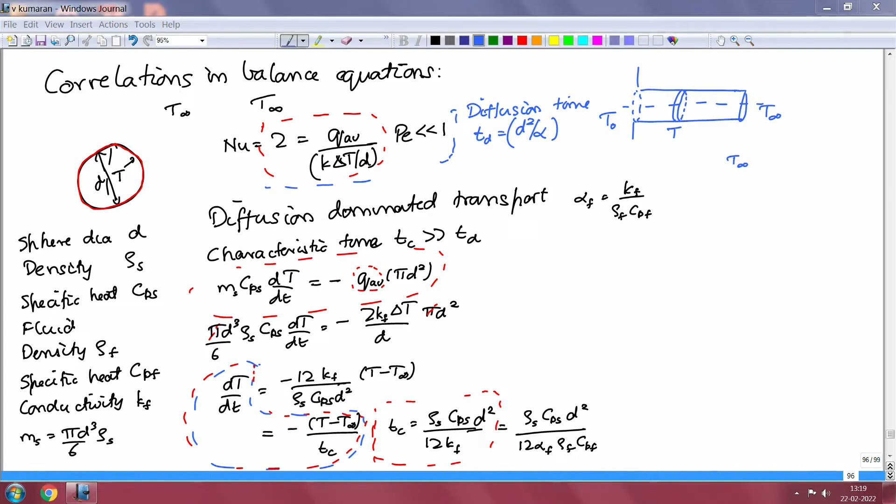The assumption that was made in deriving the correlation shown here, the Nusselt number is equal to 2 in the limit of low Peclet number, is that the object is at steady state. You have an object at a constant temperature in a fluid at a different constant temperature, and the flux is calculated. That is the assumption made when the correlation is derived.

In this particular case, the temperature of the object is changing with time. The correlation can still be used if the time required for the change in temperature of the object is much longer than the time required for the system to reach steady state once an object at a fixed temperature difference is introduced.

If you have a configuration where the entire system, the object plus the fluid, is at the same temperature at time t equals 0, and at time 0 you increase the temperature of the object to some finite value, it will take some time for the temperature of the fluid around the object to reach its steady state value. That steady state value is a higher temperature closer to the object and a lower temperature further away. We will solve for that later.

So the time it takes for the temperature field, the spatial variation of temperature in the fluid, to reach its steady state value matters. If the time required for the surface temperature of the object to evolve is much longer than the time required for the temperature field around the object to reach its steady state value, then you can still use a correlation that is derived at steady state.

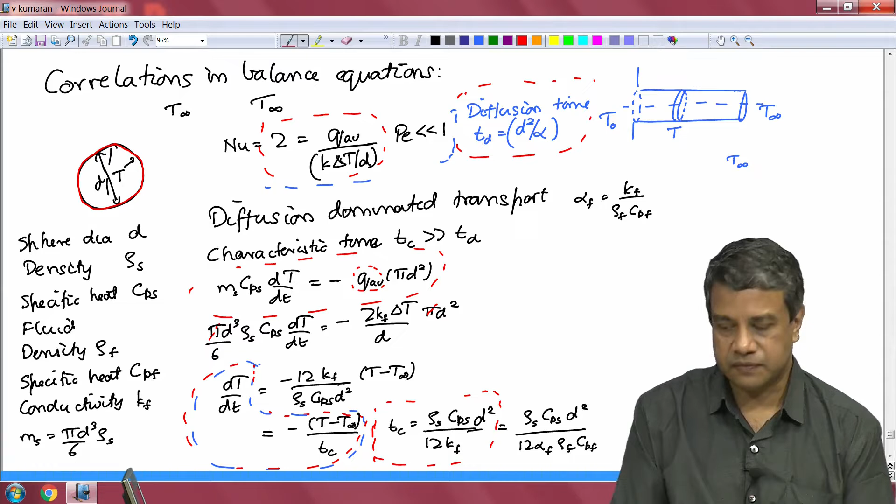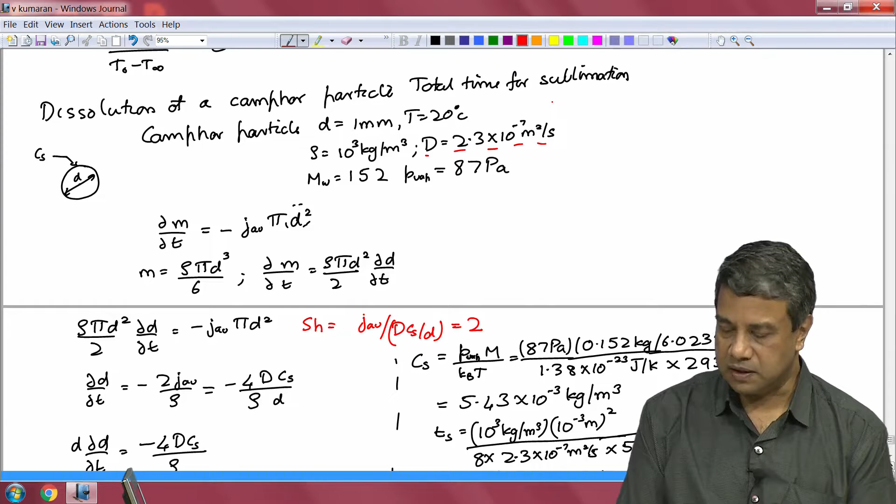We had looked at examples in diffusion dominated transport where the characteristic time for the evolution of the temperature of the object is much greater than the diffusion time. Or alternatively, in cases of dissolution of a particle, where the characteristic time for dissolution is much larger than the time required for the concentration field around the object to reach a steady state value. So, those we examined.

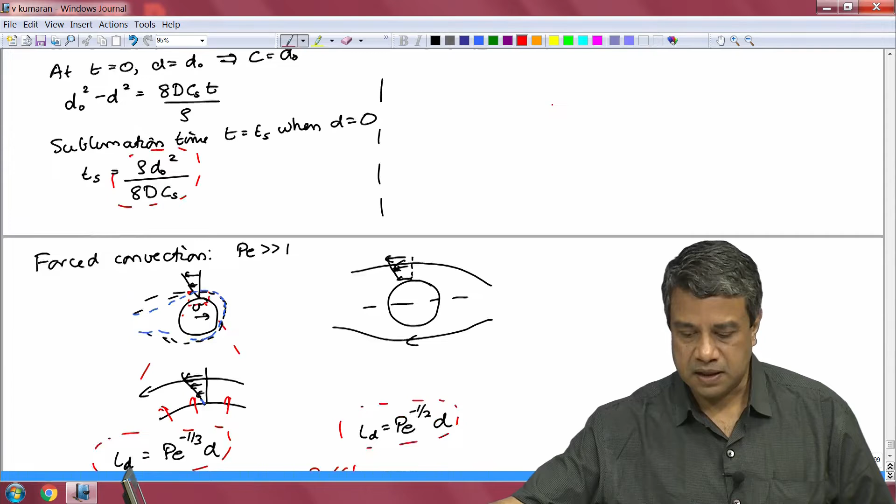The next is to look at forced convection. Forced convection at high Peclet number, the limit of high Peclet number, where convective effects are large compared to diffusive effects. You have a rapid flow past the object.

Even though convective effects are large, diffusion cannot in general be neglected, because convection only transports mass and energy along the fluid streamlines. At the surface of the object itself, whether it is a solid object or a gas bubble, there is a no penetration condition at the surface.

The velocity perpendicular to the surface is zero, and therefore transport perpendicular to the surface has to necessarily take place due to diffusion. So, for example, if you had an object of higher temperature in a fluid of lower temperature, the energy from the object will be transported due to diffusion perpendicular to the surface, and it will be swept downstream due to the fluid flow past the object. In the limit of large Peclet number, the energy conducted from the object will be swept rapidly downstream, and therefore the temperature difference due to this energy transport from the surface will be restricted to a thin region near the object.

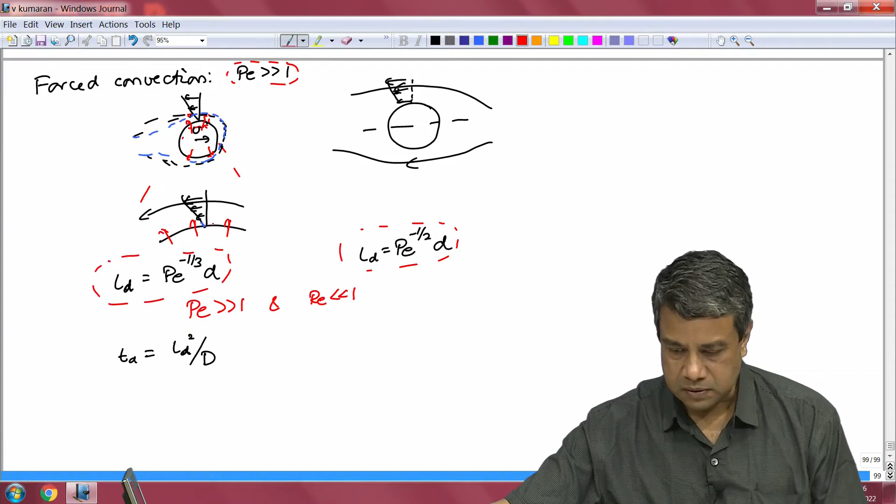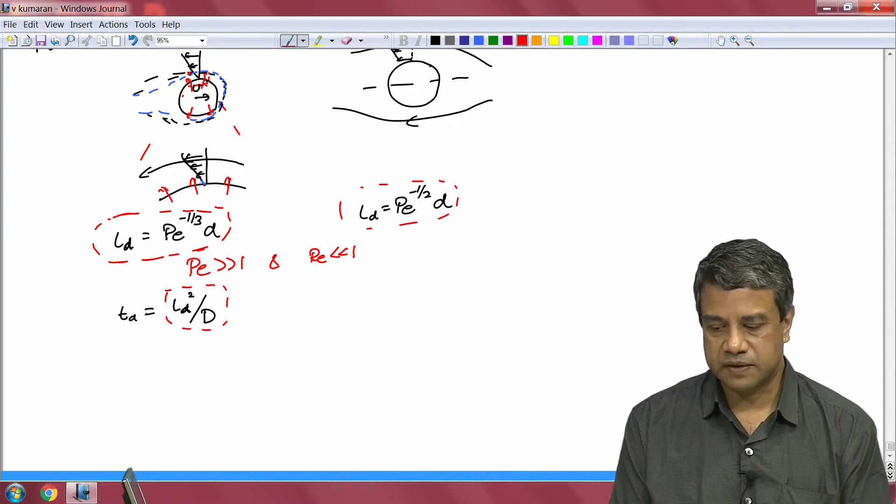So, in these cases the length scale for diffusion is actually much smaller than the dimension of the object. If LD is the length scale for diffusion, then the time scale for diffusion you just get out of dimensional analysis as LD squared by the diffusivity. That is the characteristic time for diffusion for the temperature field to develop in this thin boundary layer, or the concentration field to develop in this thin boundary layer when the surface concentration or temperature is changed. So long as the diffusion time is much smaller than the evolution time for the temperature field in the object, you can use a steady state approximation correlation for forced convection that is derived based upon the steady state approximation.

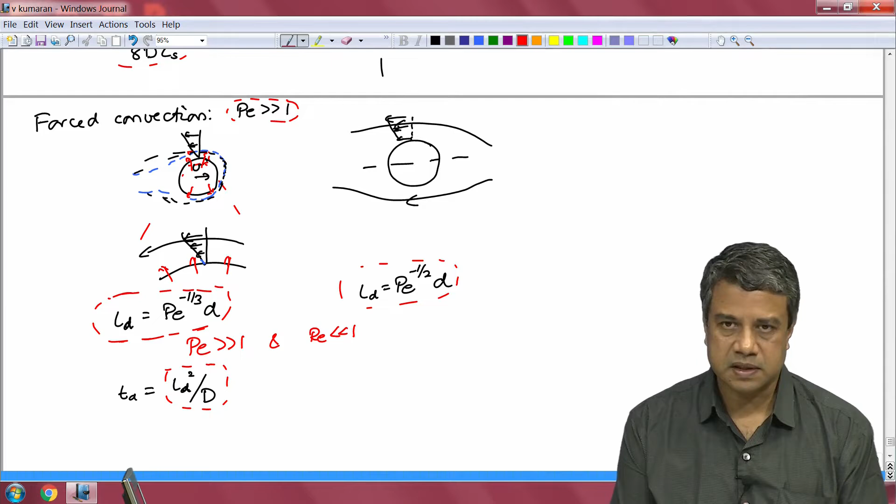So, let us briefly summarize the characteristic length and time scales for different configurations. Last time I had told you that there is a distinction between objects which have a no slip condition at the surface, where the surface is solid, and objects which have a slip condition at the surface, where you have a non-zero tangential velocity at the surface. So, let us examine that.

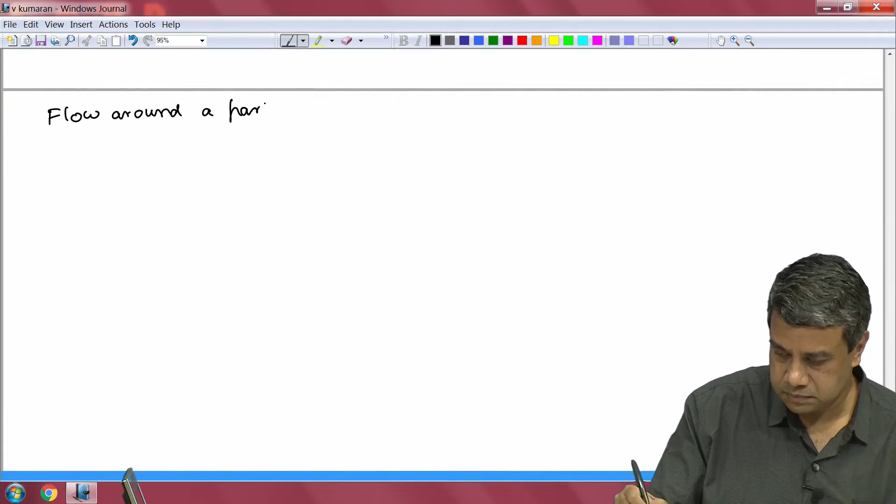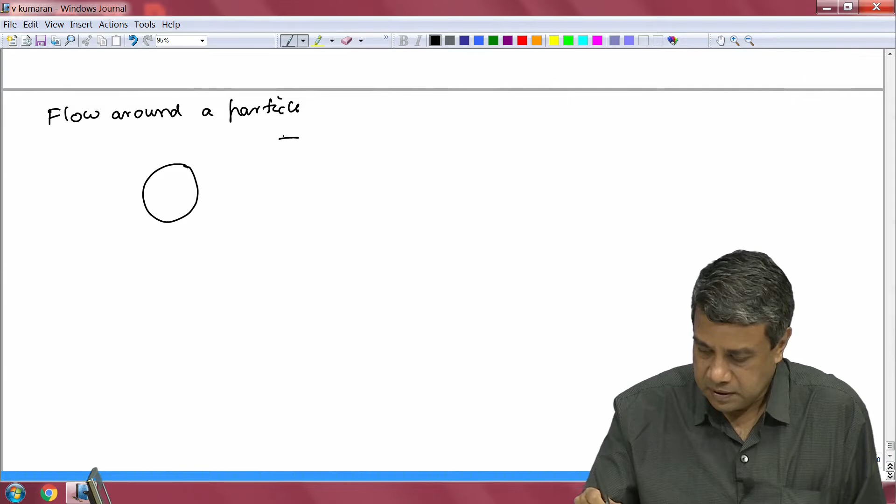First, we will examine the flow around a particle. If you had a solid particle, for example, you would have a no slip condition. So, if Vfs is the free stream velocity, and you have flow around a particle for large Peclet number, where convection is dominant, and small Reynolds number where the flow is laminar.

Recall I had told you that you can simultaneously have the limit of large Peclet number and small Reynolds number, because momentum diffusion is much faster than mass diffusion in liquids. In gases they are comparable, and therefore this regime does not exist. But in liquids, mass diffusion is a very slow process because it involves the physical transport of molecules, whereas momentum diffusion does not involve physical transport, it could be due to intermolecular forces, and therefore you can simultaneously have high Peclet number and low Reynolds number.

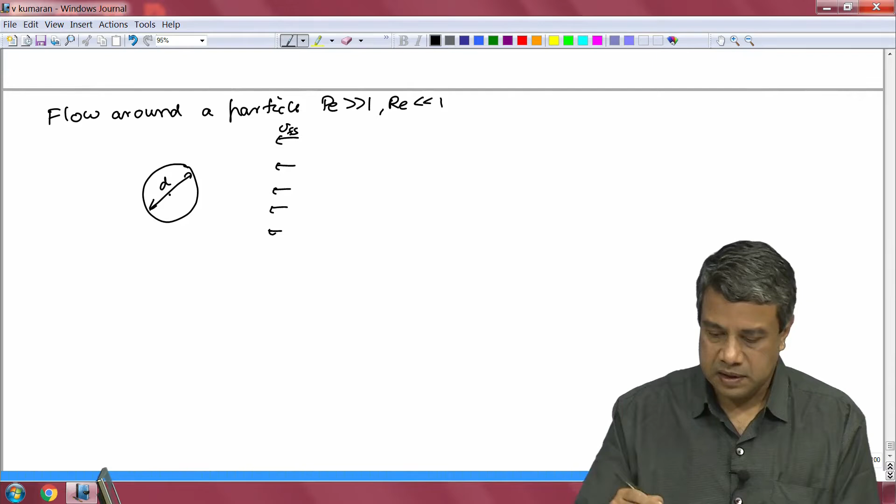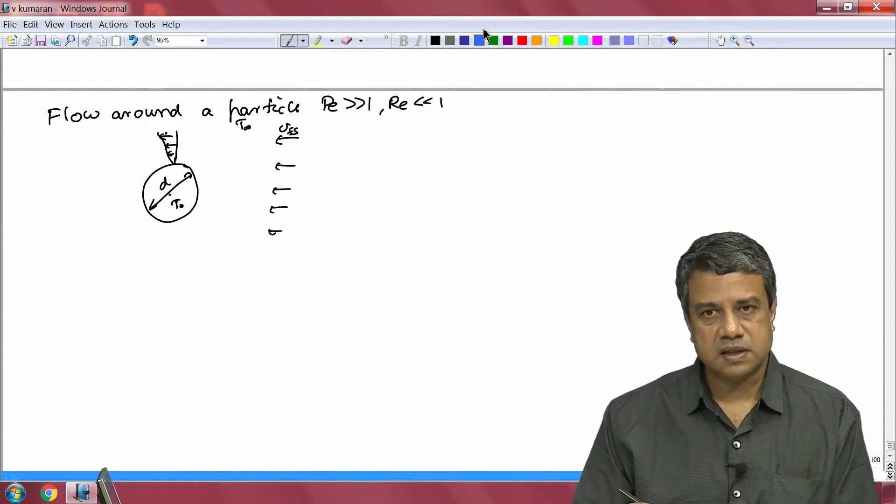If I have an object of characteristic dimension d, in the limit of high Peclet number, with a no-slip boundary condition at the surface, the velocity has to decrease to 0 at the surface. If you had an object with temperature T naught at the surface and T infinity far away, the temperature disturbance due to this higher temperature of the object will be restricted to a thin region called a boundary layer close to the surface.

The thickness of this boundary layer scales as Peclet number to the power minus 1/3. In the limit as the Peclet number becomes large compared to 1, the thickness of this boundary layer scales as Peclet number to the power minus 1/3.

Because the thickness of this layer scales as Peclet power minus 1/3, the correlation for the Nusselt number is the thermal conductivity times the temperature difference divided by a characteristic length. In this case, that characteristic length is the diffusion length, which is Peclet power minus 1/3, and therefore the Nusselt number is proportional to Peclet number power plus 1/3.

Basically the Nusselt number scales as the inverse of this characteristic length. This characteristic length is Peclet power minus 1/3 times the diameter. The ratio of the characteristic length for diffusion, LD, to the diameter of the object is Peclet power minus 1/3. Because the flux is the temperature difference divided by this characteristic length, the Nusselt number scales as Peclet power plus 1/3.

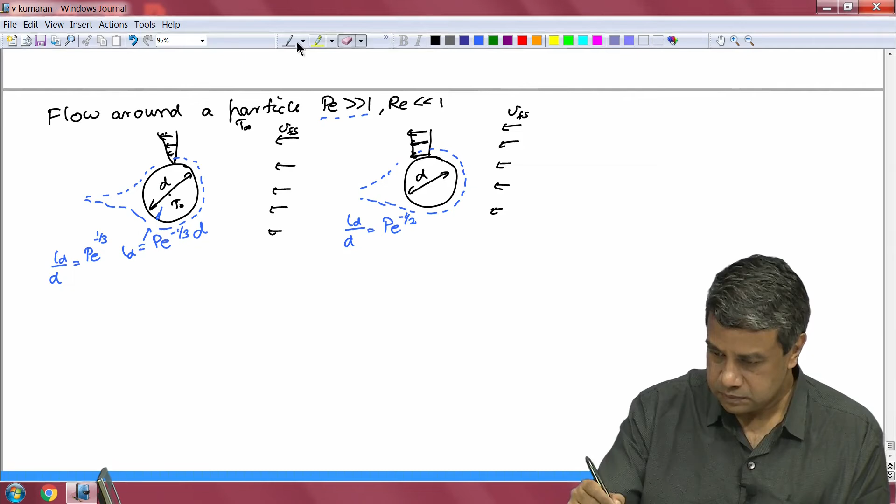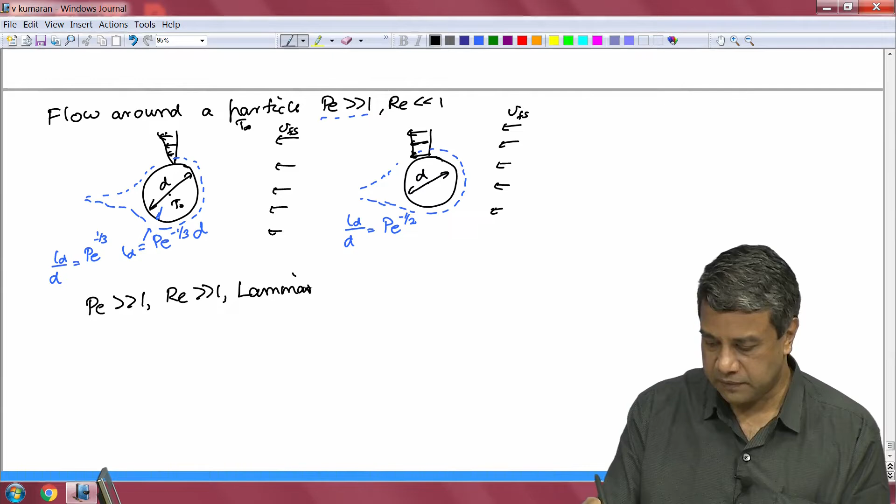Now what about in the limit of a laminar flow with high Peclet number and high Reynolds number? In that case, the Nusselt number does not depend on the Peclet number alone, because the flow does not transform in a self-similar manner. The flow pattern does not remain the same as the velocity increases at high Reynolds number.

In that case also, for the flow around an object with a no-slip condition at the surface, you have a boundary layer, whether it is for concentration or for momentum. The thickness of this is classically given by LD/D equals Reynolds number power minus 1/6 times Peclet number power minus 1/3.

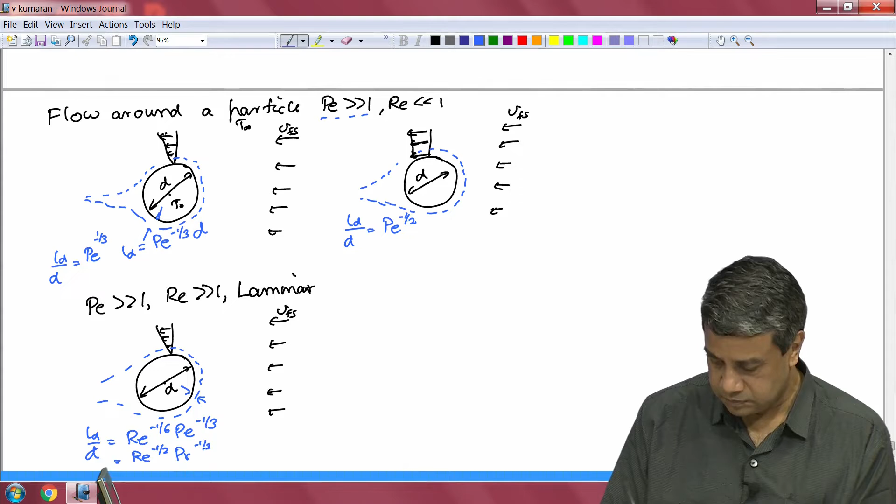Alternatively, if I write Peclet number as Reynolds number times Prandtl number, this becomes Reynolds number power minus half times Prandtl number power minus 1/3. Note that the Peclet number is just the product of the Reynolds number and the Prandtl number.

Even in the limit of high Reynolds number, recall that for high Reynolds number flow around a solid particle, you have a sequence of flow patterns: starting with an asymmetry about the mid plane perpendicular to the flow, followed by a separation bubble at the rear, followed by vortex shedding, and then turbulence in the upstream boundary layer. This is valid only for laminar flow in the boundary layer at high Reynolds number.

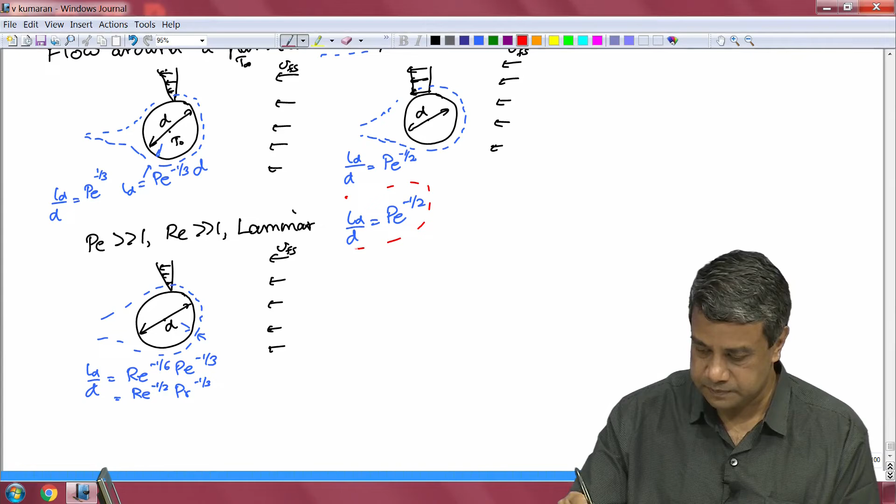That sequence is not present for the flow around a bubble. Provided the surface of the bubble is sufficiently clean, with no surfactants or anything, what you have for a bubble is potential flow at high Reynolds number, and in potential flow basically the same kind of relationship applies for the flow around a bubble as well. So those are the sequence of patterns for flow around a particle.

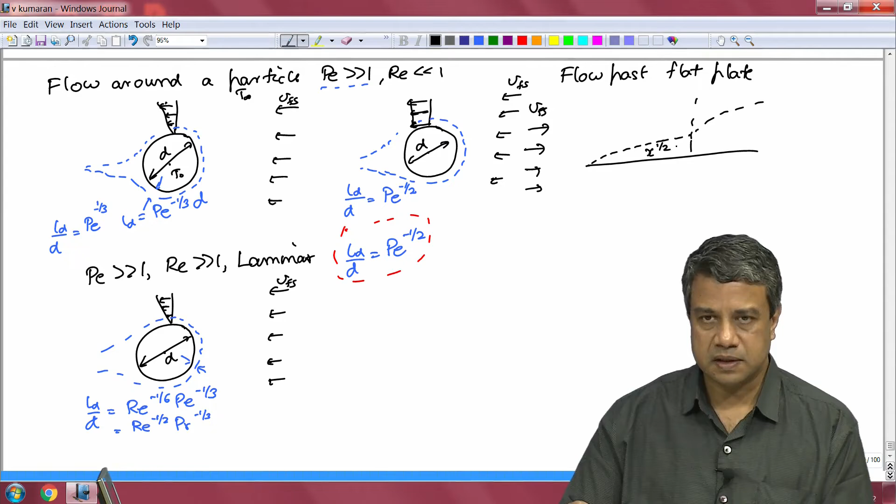Now for the other case we can consider: flow past a flat plate. As you recall, in the case of flow past a flat plate, you had a free stream velocity, and then you had this momentum boundary layer, which was initially laminar and then became turbulent. In the laminar region, the boundary layer thickness went as x power half, whereas in the turbulent region it went as x power 0.2, where x is the downstream distance from the edge of the flat plate.

In this case as well, if you have flow past the surface, the boundary layer for mass or energy, for a laminar flow, this diffusion length by the diameter is equal to RE power minus 1 by 6, PE power minus 1 by 3. It is the same as what you have for the flow around an object, for the laminar flow.

It is different, of course, for a turbulent flow, and that is a much more complicated picture, which I will not go into in detail in this lecture.

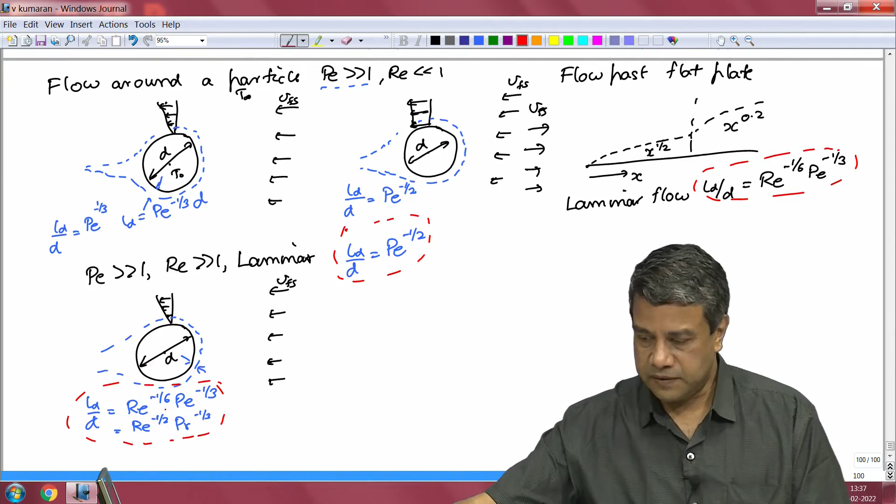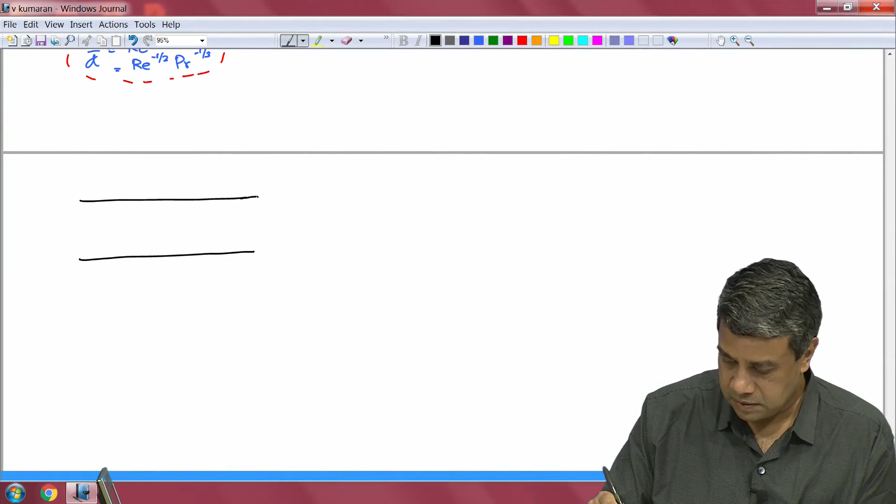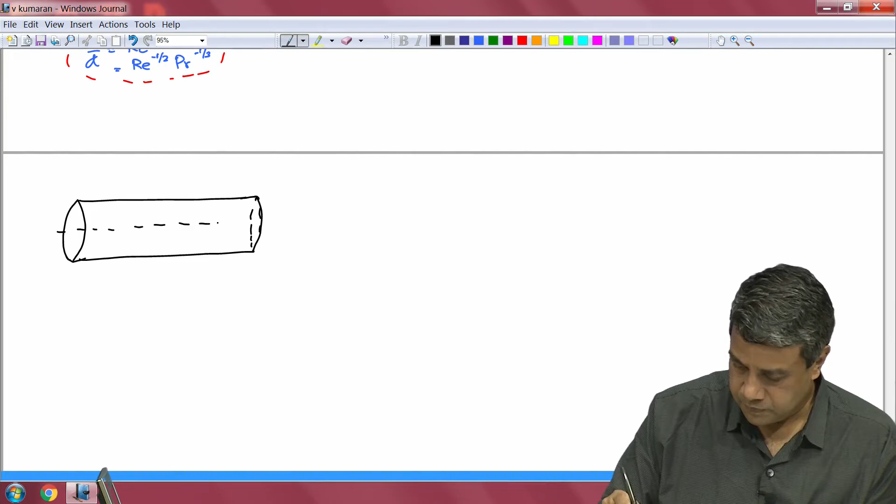And finally, we can examine internal flows, for example the flow in a pipe of diameter d and length L.

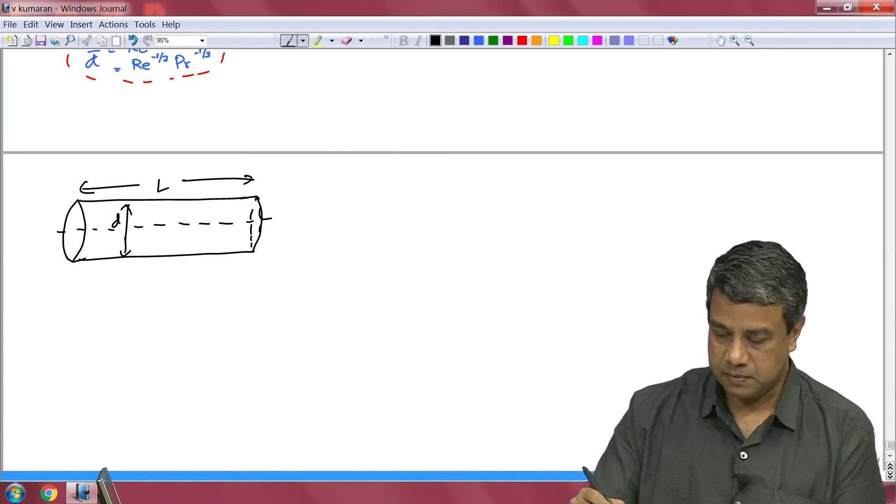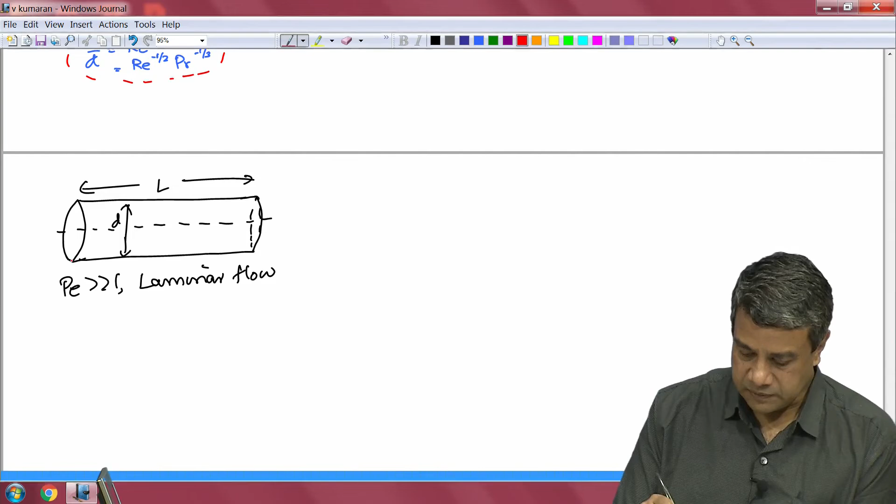In the limit of high Peclet number, for laminar flow, any energy that is being conducted from the wall of the pipe is rapidly swept downstream due to convection. Therefore the disturbance to the temperature is restricted to a thin region close to the wall whose thickness is much smaller than the pipe diameter, because any energy conducted from the wall is rapidly swept downstream by the strong flow.

And this characteristic boundary layer thickness for pipe flow, for laminar flow, scales as: the diffusion length divided by the diameter is equal to Peclet number power minus 1 by 3 times D by L power minus 1 by 3. So it has a high Peclet number limit, and this also we will derive later.

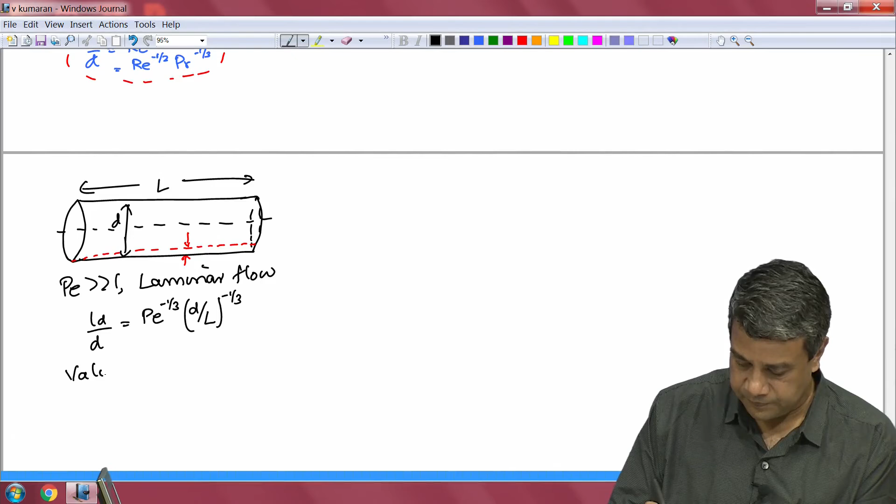This is valid only for Peclet number much smaller than L by D. Note that we have considered the high Peclet number regime, and therefore the diffusion length divided by the diameter is going to be small compared to 1, because Peclet number power minus 1/3 times D by L power minus 1/3 -- this product will be small compared to 1. So, I am sorry, I have said it the other way around: for L by D much smaller than Peclet number.

And Reynolds number much greater than 1 and Peclet number much greater than 1 for the flow in a pipe. Once L by D becomes comparable to the Peclet number, this boundary layer thickness becomes comparable to the pipe diameter, and then the diffusion length becomes comparable to the pipe diameter. So this is the diffusion length for a pipe flow, and once again we will derive that later.

The other case I will consider is flow of a vertical film. If you recall, we had earlier done the flow of a film down an inclined plane, and the velocity profile looks something like this.

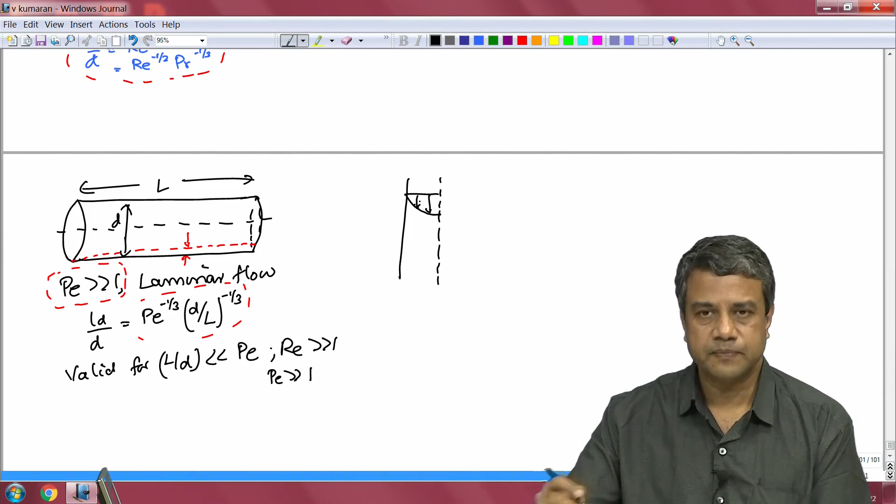We had calculated the velocity profile for an inclined plane flow. This vertical flow is the same as that inclined plane flow, except the angle is 90 degrees. In this case as well, if this is the start of the contacting section, let us say you had a gas species diffusing into the film and getting convected downwards. And if the Peclet number, based upon the film thickness h times the average velocity divided by the diffusion coefficient, that is the Peclet number.

If this Peclet number is large, then the penetration of this solute into the liquid film penetrates to an extent which is small compared to the thickness of the film, and this is the characteristic length for diffusion. That characteristic length for diffusion divided by the thickness goes as the Peclet number to the power minus half, times H by L, where L is the total length of the film.

This is an example where the condition at the interface is a non-zero velocity, just like we had in the case of a bubble. Flow in a pipe is an internal flow with zero velocity at the wall, as in the case of external flow around a solid particle. The flow down a thin film is an external flow in which you have a zero shear stress condition at the surface, a finite velocity at the surface, just like we had in the bubble. In that case you can see that these exponents turn out to be half.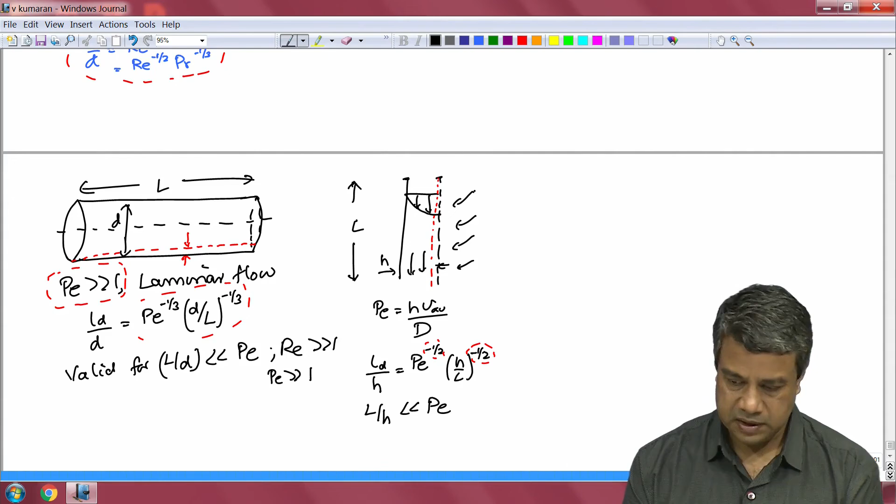And we have another condition here, which is that L by H is much smaller than Peclet number. In this case the diffusion length is going to be much smaller than the thickness of the film. So in those cases we can assume a steady state approximation for the correlations, and use those correlations in order to determine the rate of change of the temperature of a solid object, for example, in a fluid flow.

So let us take an example. I have a steel sphere with diameter equal to 1 centimeter. Initial temperature is equal to 300 degrees centigrade. And I have air flowing past the sphere with the free stream velocity of the air equal to 1 meter per second.

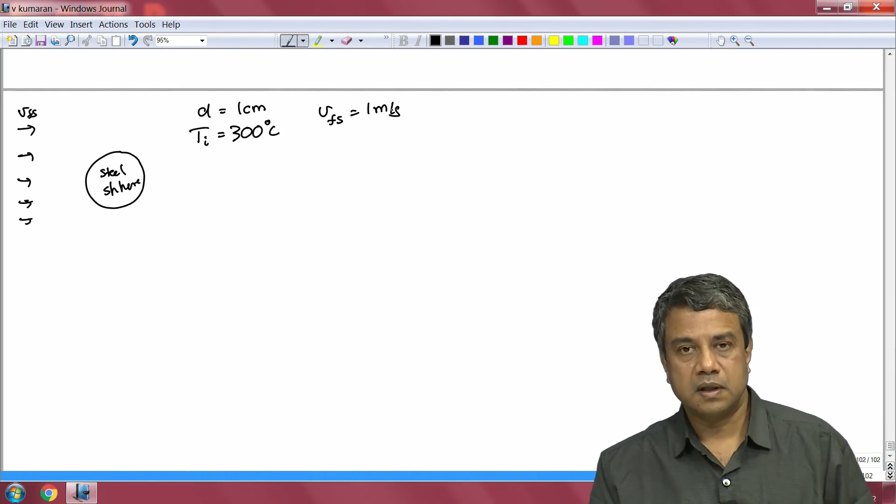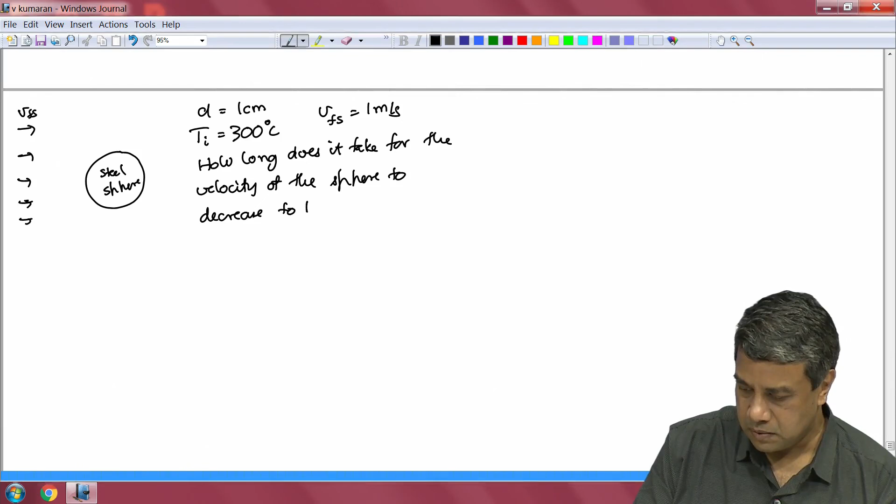And the question I am asking is, how long does it take for the temperature of the sphere to decrease to 100 degrees centigrade? The air has velocity Vfs equal to 1 meter per second, and the temperature of the air is equal to 0 degrees centigrade. So this air is cooling the sphere, and what we would like to find out is how long does it take for the temperature of the sphere to decrease from 300 degrees centigrade to 100 degrees centigrade.

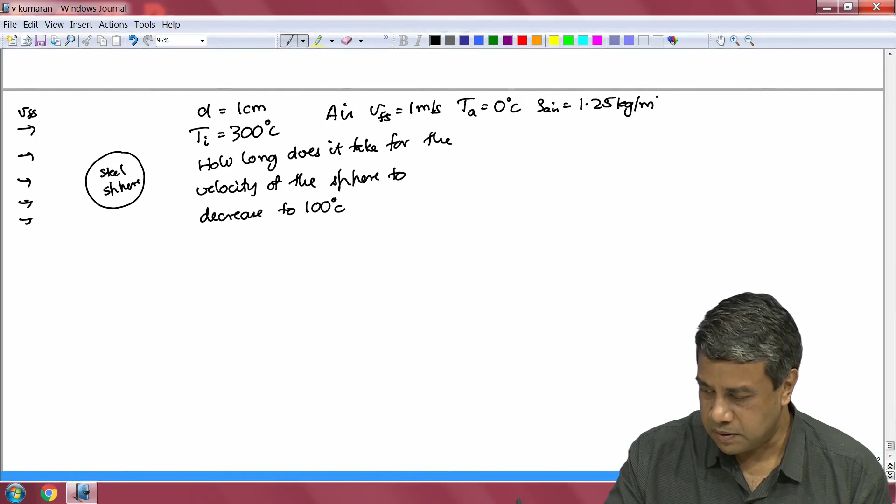So for that we need the properties of air. Rho air is equal to 1.25 kg per meter cubed. K of air is equal to 2.4 into 10 power minus 2 watts per meter per degree centigrade. Cp air is equal to 10 power 3 joules per kg per degree centigrade.

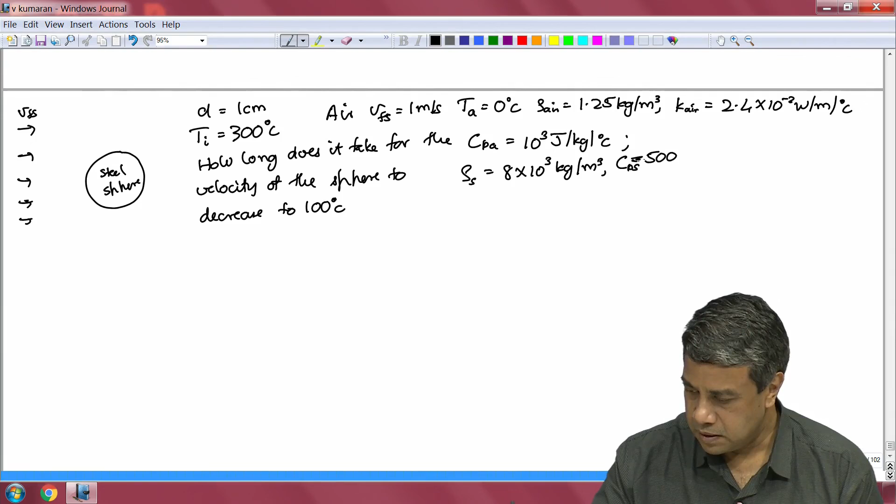And the density and specific heat of steel: rho s is equal to 8 into 10 power 3, 8000 kilograms per meter cubed, and the specific heat of steel is 500 joules per kg per degree centigrade. So given these properties, I need to find out how long it will take for the temperature of the sphere to cool from 300 degrees centigrade to 100 degrees centigrade when air is blown past it at a velocity of 1 meter per second. So that is a problem.

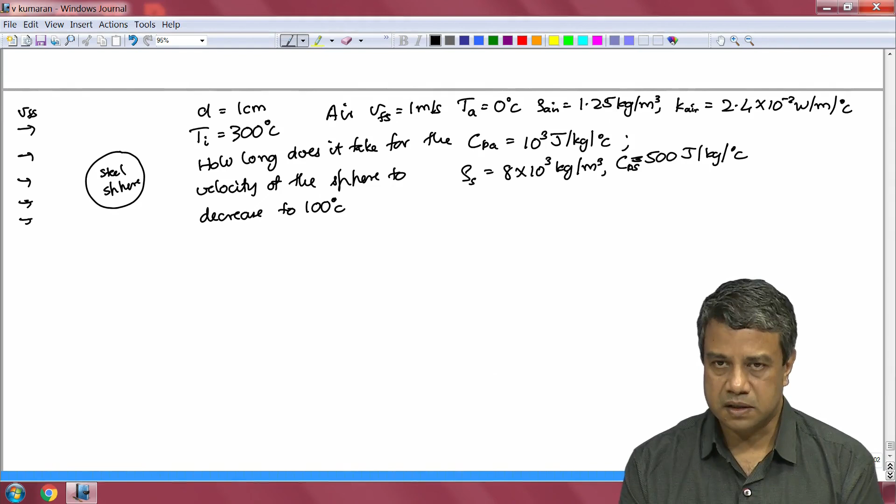I will start in the next lecture with solving this problem before we go on to solve the problem of dissolution of an object due to mass transport in natural convection. These two problems we will consider in the next lecture. I will see you then.